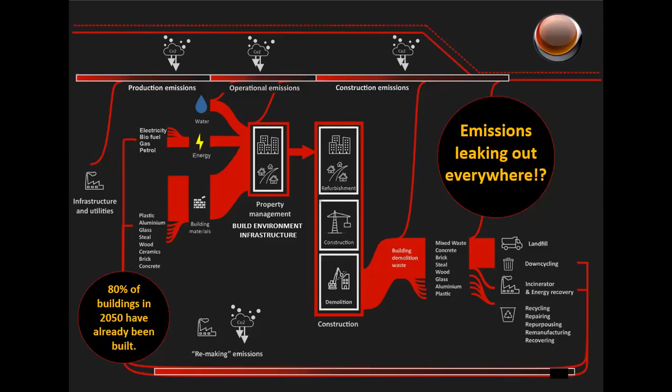Finance, facilities, and asset management are also going through a renaissance and rethink of the concept of value. With high cost of raising capital for construction projects and unknown return on investment, a new way of thinking started to emerge. This is the space where the concept of value and values meet technology.

In the past, we were unable to compile data and information across all stages of the life cycle, or to design data sets that will tell us about CO2 emissions from each piece of equipment, as well as its wear and tear, cost of replacement, and cost of risk if we don't maintain it.

Now with cutting-edge technology, we can build information data sets that can tell us how organizations deliver social value, calculate total cost of ownership, and manage properties' environmental performance in real time, which I will demonstrate in the next slide and show you the digital twin model.

So match technology to your concepts and goals to get the best value from your investment.

Do not go into space without key thinking styles and a NASA-style base crew to put you back on track, even if it is with a pair of socks, as Tom Hanks found out in one of the Apollo mission movies.

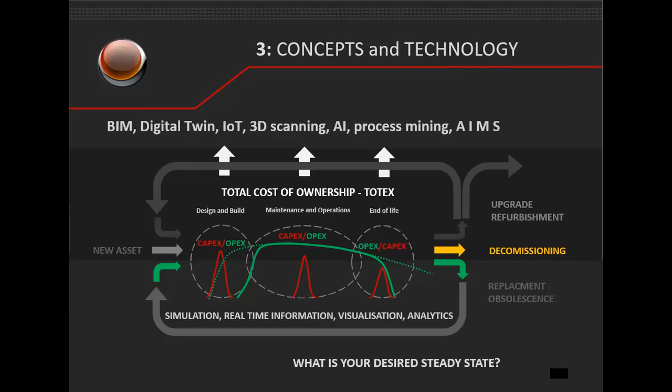So as promised, I will load in a second a real-time digital twin model to show you how it could transform your day-to-day operations. The model is courtesy of one of our ecosystem partners, Digital Twinning Australia.

To get the concepts in place, a digital twin is a digital replica of an actual physical asset with attached functional data and information for making informed decisions.

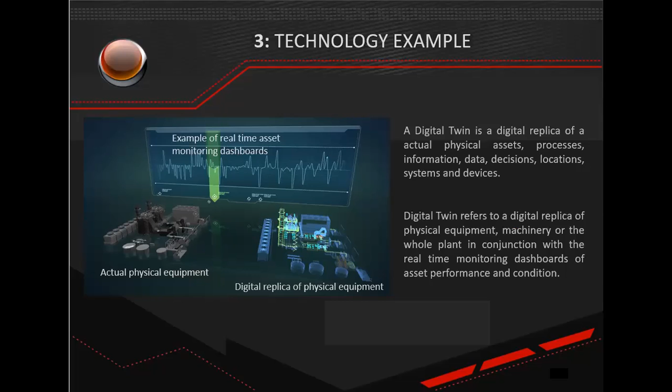It contains information about locations, systems, and devices, replicating physical equipment in a 3D environment. A digital twin can represent machinery or the whole plant in conjunction with real-time monitoring dashboards showing asset performance and condition. Okay, let's have a look at the digital twin technology in action.

As there is more need to track and manage asset performance to achieve net zero and reduction in fossil fuel consumption, it becomes more prevalent to focus on the asset data throughout the entire life cycle to ensure consistent outputs.

A dynamic digital twin is therefore a virtual replica of an actual asset that allows organizations to leverage decisions based on data that affect almost every aspect of their customers and their own businesses.

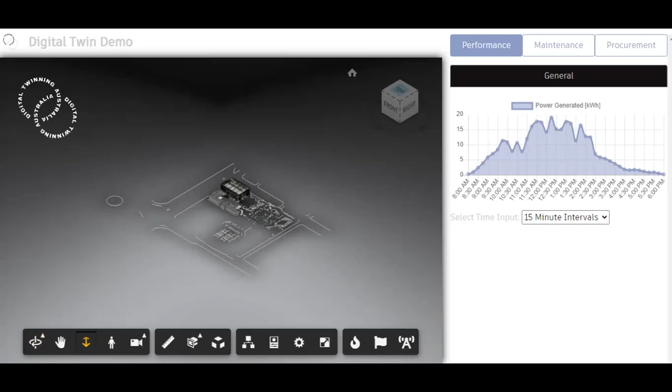What you see on the left-hand side is a digital twin model of a school in Adelaide.

On the right-hand side, you can see the real-time performance data from IoT sensors showing the amount of energy generated by solar panels located on the roof of the building. The model gives us the ability to look at the data in different frequencies and time intervals.

I'm going to zoom into the roof of the building where solar panels are located to show you how the IoT data input changes.

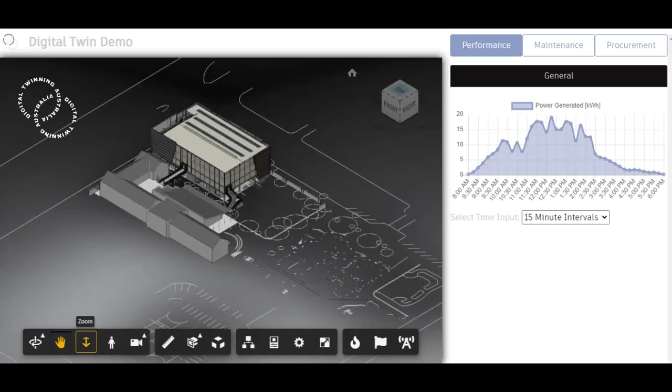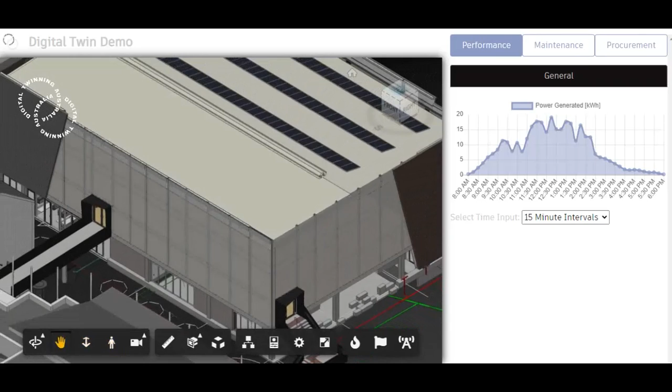The idea being that once we select an asset, and in this case it's going to be one of the solar panels on the roof, a real-time data flow will allow us to see, on the right-hand side in the window, the change in the data flow.

The real-time asset performance data enables us to make informed decisions. For example, if we want to change the internal environment conditions, or further drill down into equipment output, or focus on a group of panels and the outputs holistically.

That way, we can look into meaningful analysis by showing how a company's asset performance stacks up against the net zero targets, or where the parameters are outside of the threshold. All the thresholds we can preset when we load and start using the digital twin.

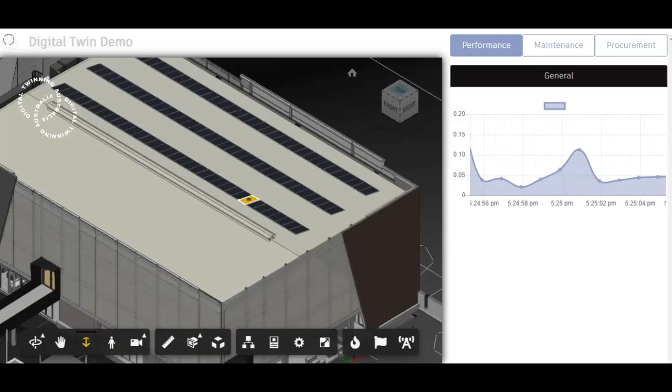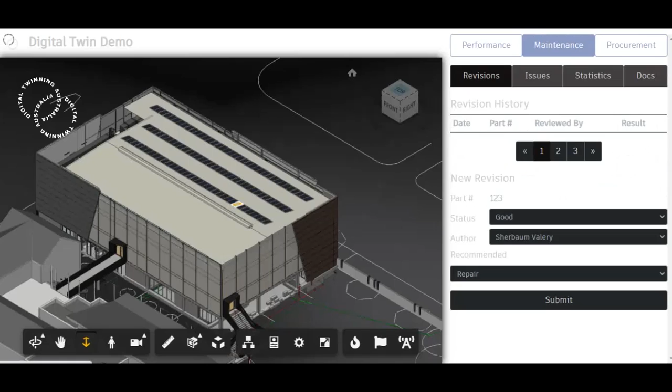Should we decide to take action and adjust asset output or configuration, we can use the digital twin as a visual help desk as well. On the remaining tabs, we can investigate the asset history, check O&Ms, and construction handover information.

If there are any issues with the panel or any other equipment on that matter, we can use the digital twin integration with finance and procurement systems to book an engineer to attend the site.

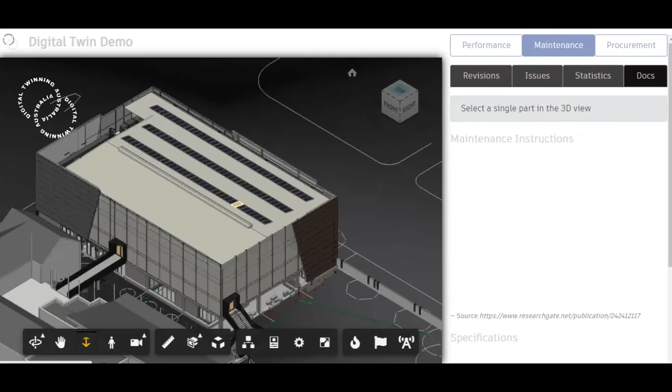If we use the digital twin as a virtual help desk, we create a single source of truth environment where help desk staff, engineers, and the management team look at the same input data in real time. That cuts down the time to investigate faults.

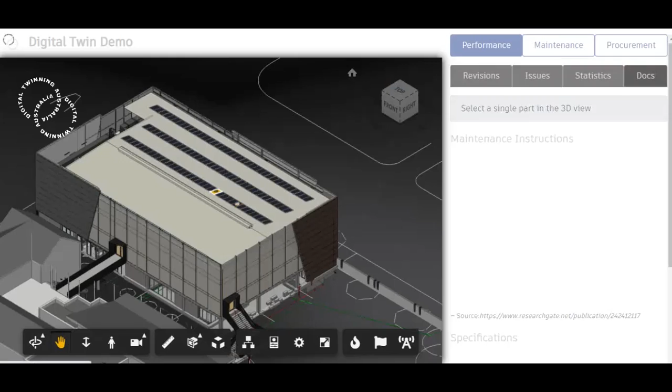Assets can be reset from the help desk remotely. And should there be a requirement for a site visit, we can actually buy parts in advance from the procurement tab by selecting the right supplier.

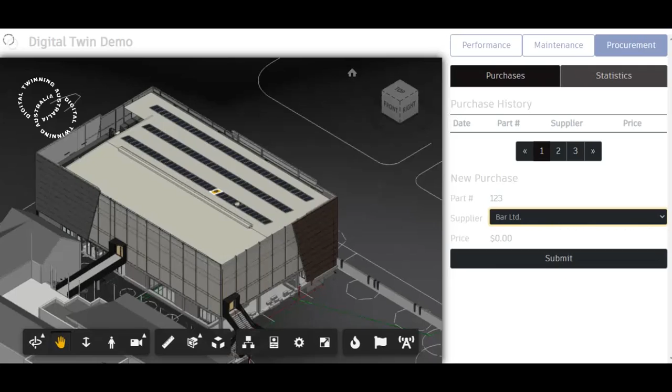This opens up opportunities for greater coordination and collaboration, increased efficiency and accuracy.

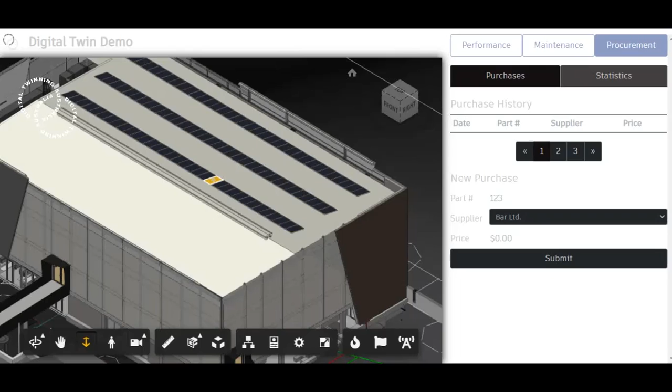So for example, let's say that we receive a call from the customer to the virtual help desk. It's too cold, too hot, or heating is not working at all. Then what we can do, in the model browser, is look into each asset individually, so mechanical, for example.

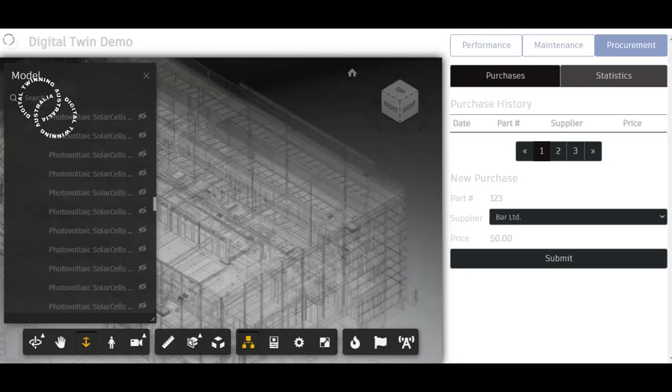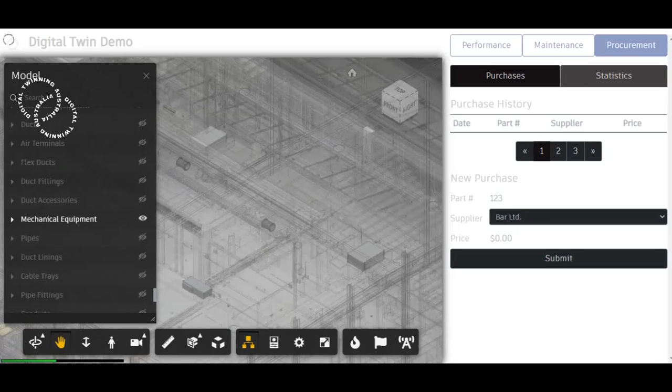As you can see, a number of mechanical equipment assets has appeared within the model. By selecting it, we will see the asset performance chart loading on the right-hand side again. So once I zoom in, we can perhaps pick one of the aircon units in the model, and in the Performance tab, we will start to have the charts loading.

By being able to pick the asset in the right location that's been specified by the customer calling to the help desk, it gives us an indication first if the asset is working. We can further look into the root cause analysis and fault finding virtually, or actually send someone to site. Often we would be able to adjust parameters remotely and only visit the site should the hardware need actually changing.

Similar with the solar panels, the threshold and the output that can give us an indication of how much CO2 is being saved per asset can be set really at the beginning of the model when the site goes live, in the process of going from construction to operations.

So to summarize, the digital twin can assist us with capture of accurate real-time information available to all stakeholders as a single source of truth to make collaborative decisions.

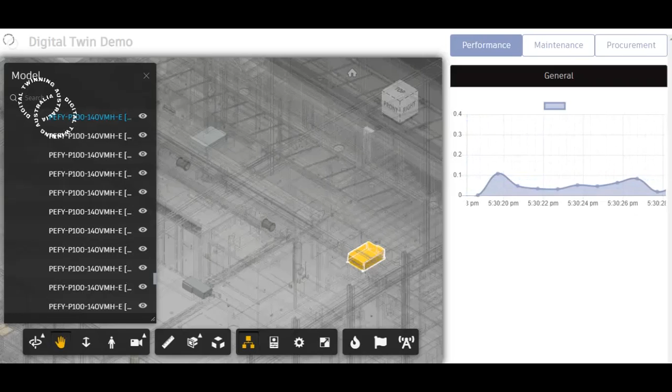Gathering data and information with IoT can save time, money, and CO2 emissions by enabling us to remotely look into the digital twin dashboards and investigate faults virtually or on site should it be required. This leads to a further reduction in time, especially in terms of administrative tasks.

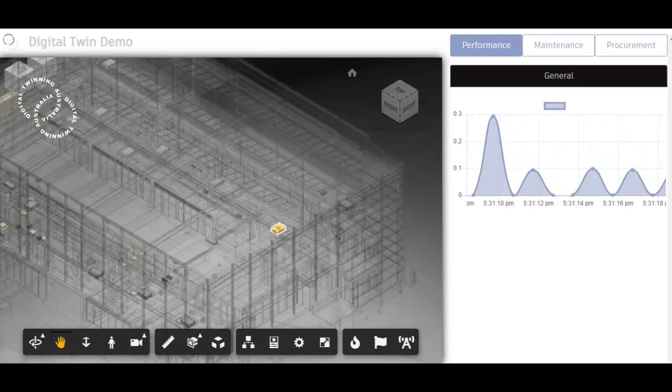So when we look at one single item, we can actually look at the whole system. In this case, we can further look at the main plant that supports that one unit, which we can see here on the back.

So we're not only reducing the administrative tasks and investigating the model remotely, this also enables us to focus on predictive maintenance combined with advanced analytics to explore different scenarios. So we can, for example, click at the other asset and see how the main plant is functioning in relationship to individual unit.

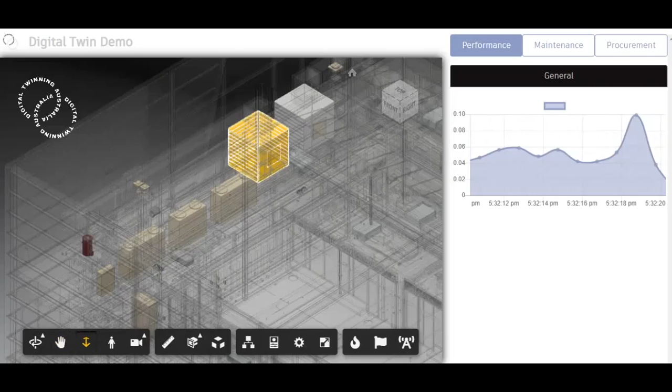So in case of this model, we can investigate not only individual items, but also the system and each individual item of the whole system. So I will now zoom out and show you the model from a distance again. I'll be moving into the next stage of the presentation that will follow via the slides.

What ties concepts, technology, and decisions together are business processes. This is especially visible between finance, facilities, and asset management, where purchase orders and work orders do not always match. This is often due to organizational silos and departments, contract providers, and miscommunication between different parts of the companies, creating black holes of data, information, decisions, and actions.

So processes are key components of the target operating model, also known as TOM. A good TOM should have key components and a maximum of 30 processes that enable anyone in the organization to track down points of failure in the process. For continuity, all processes must loop back to the next stage.

A TOM's role is to consolidate relationships through business processes between organizational departments and the supply chain, and to align the commercial contract obligations and internal JDs. What gels the TOM together is the vision, concepts, and goals that everyone is aiming towards, bonded by technology, data, and information.

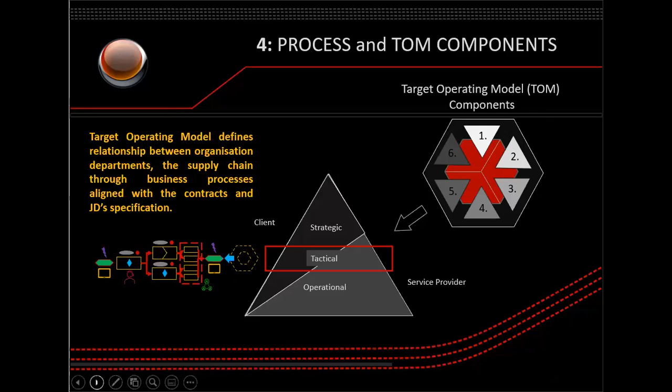The TOM processes should not be designed with the current as-is delivery structure in mind. TOM reflects the future state, known as to-be, and a vision in the form of images and process maps. This should be focusing on decisions that move actions through the organization. Having a stakeholder matrix behind embraces collaboration.

The more colorful the vision and the process maps, the better. So pick shapes, forms, symbols, make it visually attractive. Color code tasks so people can easily identify different aspects of the process. Say no to boring swim lanes, let people learn the process code.

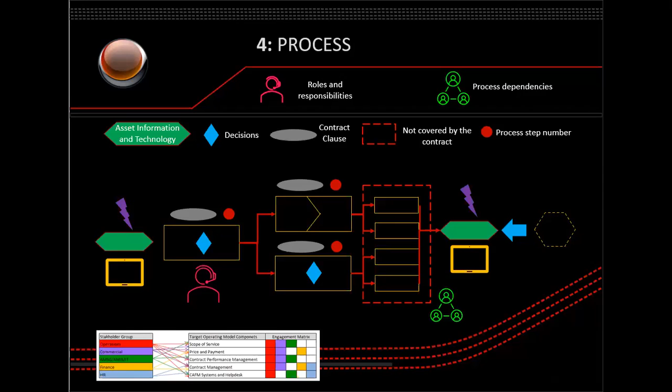At AMS, we have developed a rapid transformation system that streamlines all transformational activities until the benefits can be realized. We are a great believer in transferring knowledge where organizations do the work, and we provide at each stage handouts, templates, guidance, and advice. It's like learning to cycle with stabilizers.

So the 5 steps are business diagnostics. This can be done with AI process mining to get the razor blade sharp view of your business processes in action in real time.

This is not an essential stage. However, it can help to identify the as-is and starting position very early on, and the scale of the transformation challenge.

Target operating model, you know everything about it. It's building your vision, value proposition, and business processes bonded by technology, data, and information, leading to the business case for transformation.

Integration roadmap. This is the beginning of developing transformation programs, structuring workflows, identifying dependencies, impact on the current business, selecting the team, procuring scope of service, and integrating the new solution into business as usual, taking human factors into consideration. That's the stage where most of the transformation efforts need to go into.

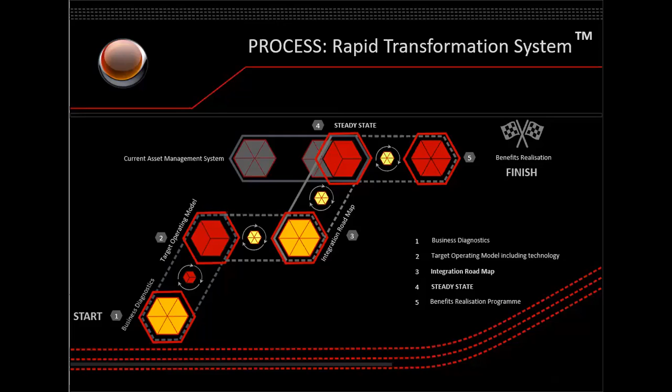As this is the last slide before we touch base on benefits realization, I would like to spend a few minutes to summarize the rapid transformation system principles leading to developing company vision, technology-driven target operating model, and transformation into the future state. So clockwise, the key takeaways are: context is everything, and it informs your vision and target operating model design.

Second, make sure everyone in the workforce is engaged in creating the vision and TOM design. Human factors can make or break transformation efforts. Match technology to your concepts and goals to get the best value from your investment in technology.

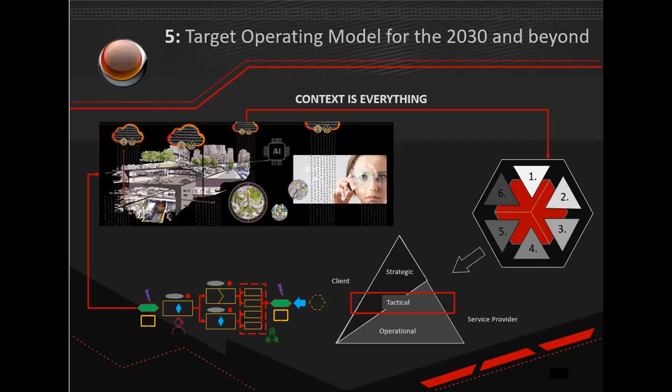Use processes and systems to guide you through the kaleidoscope of transformation. Know your why and take actions towards it. Rest assured that there is a big win at the end and plenty to celebrate, having a great big party.

At this stage, your TOM becomes the new delivery vehicle with benefits realization built into the business processes. That is when your organization will be firing on all cylinders, delivering excellent service to customers. This is where technology starts to play a key role and becomes the enabler delivering your vision.

And now you know the choice of BIM, digital twin, IoT, or anything else is academic if it is not considered and built into the target operating model design as an enabler of benefits realization.

So what benefits can we get? For example, digital twin can cut down the planning time of shutdowns and fault finding by half. Real-time data flows using IoT give you facts and figures of asset performance over time.

That is where AI comes into play, to analyze and recognize patterns of asset failures and give you predictive analytics about future expenditure or equipment cost of failure.

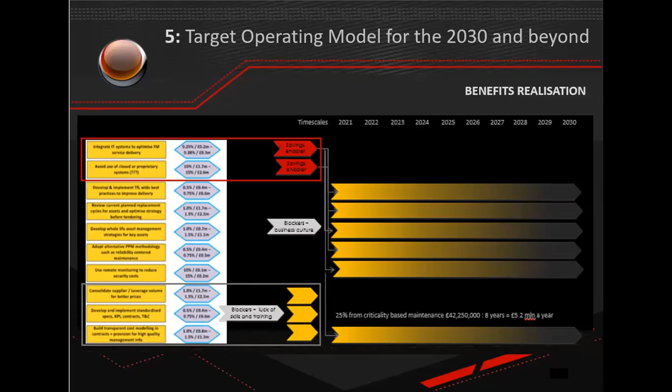That way, you can cut down on your maintenance visits and move towards a performance and condition-based maintenance approach enhanced by technology. This can lead to setting up new revenue streams by selling on your information, net zero efficiency benchmarks. This is when your data becomes a commodity and generates profit and benefits from day-to-day efforts.